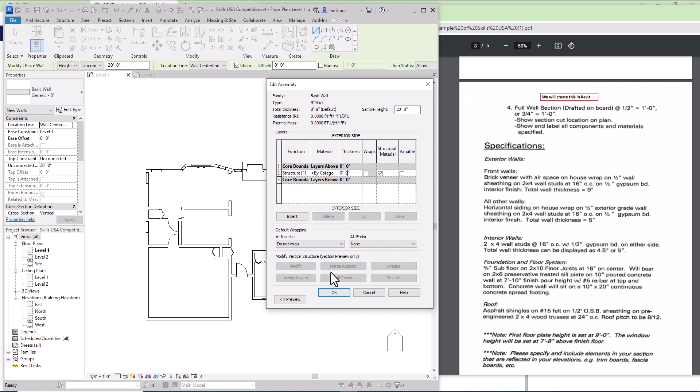Once you create that wall, in fact, I'll change this one to 9-inch on mine, but you go through and put the layers in here so that you can get the materials so that later on you're going to see that it's brick on the outside. You see how there's exterior and interior? Go back to that assignment and brush up on it and create that. I'll go ahead and create it as 9 just so that I can have one.

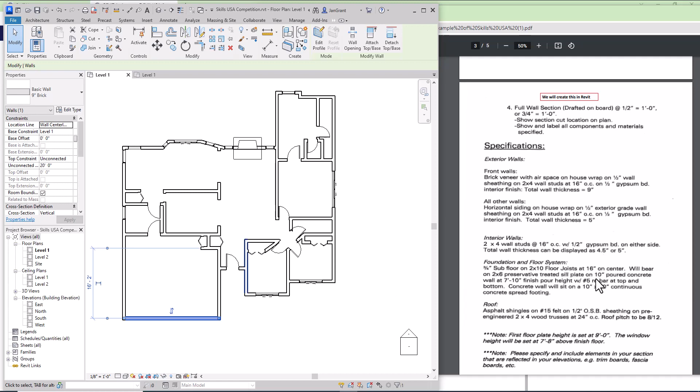So that means that all of those exterior walls that you've created, you can select them and come over here, drop this list down, and go to your new 9-inch wall that you created and make sure that all your exterior walls are that 9-inch wall that have brick on it. You can tell that it has brick on it by looking at the plan itself. All of this along the outside, in front of the garage, the whole front. So the whole front of the house right here is brick, but everything else is siding. So it's going to be your other one on the outside, and then you'll have interior walls.

So once you create all of those, you can swap them out. The other thing I want to show you here is we don't want to end up with a bunch of little segments of walls. We need to have one long wall that's all one piece with these openings. So the openings will help you to have openings without the whole wall going all the way up and taken out.

So if I looked at this in 3D and I got close enough, you see how this is going to have these openings, whereas this other one over here that's separate. And you know, this is us starting. I'm so happy that you are working with it. You see how if we have separate pieces, the whole wall is going to go all the way up. So good learning experience, right?

And so, well, that's the first thing I wanted to show you is to create your walls. Make sure that you have those walls swapped out and that you have your, I have my list here, and that you have your openings in there so that we don't have the walls all the way up. And then from that point,

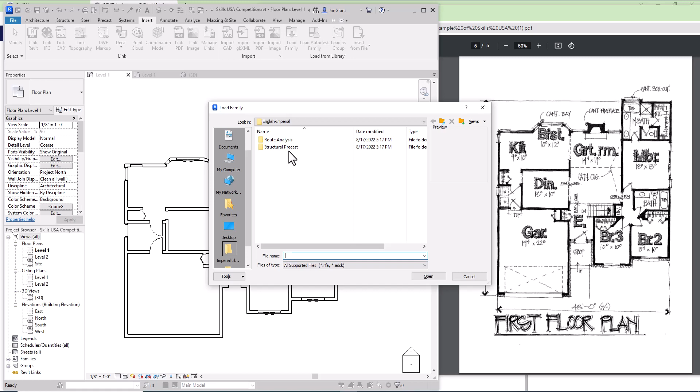Now some of you may have the older Revits, and you could pick load family and actually see the loaded families here. I did include in the modules a link to getting all of those so that when you click on here, you have them. I just haven't done it yet. But if you didn't do that, you can go here under Insert. You should be able to go to Load Autodesk Families right here.

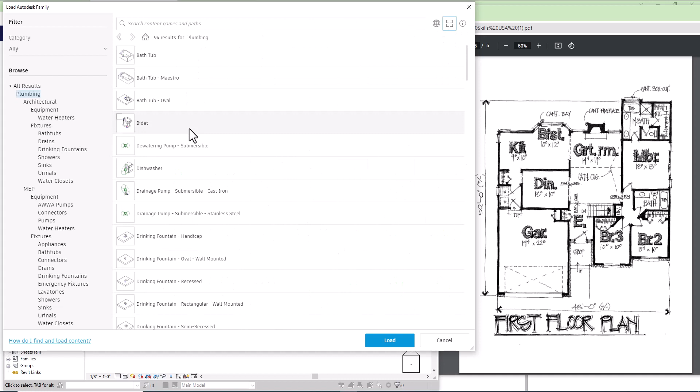So what we're looking for, the category that we're looking for is plumbing. If you go over to plumbing, even if you had all of them in the other icon there direction, and depends on how you want to look at this, you can look at it in this tiled view up here. You can change this to a list view. I have a whole list of things that you can get from here.

You can put a check mark in dishwasher here. You should be able to get the lavatory vanity. If you'd like to use that one, it has a sink already in it. We have a stacked washer and dryer in here someplace. So let's take a look. There it is. I mean, you may or may not use it, but you can look at that as an

option. We have this toilet domestic 3D right there, and there's a tub as well. A tub right here that is 3D. We want to try to get 3D so that when we get our camera views, we can work with it in a better way for our views.

And then we have a washing machine in this one, and we're going to need to find a spot here, guys, for the water heater. Something really small and tankless, but mostly typical. We're going to have to find a spot in the plan for that. So these are a few that we need for our drawing. I'm going to go ahead and pick load. Once it loads in there, I'll be able to use it.

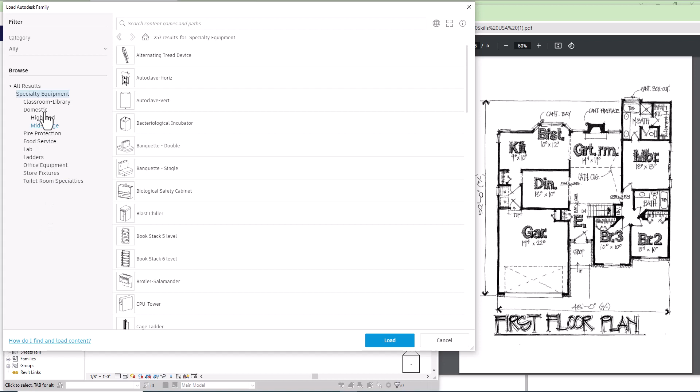And then the other thing, we can go back to the load Autodesk families. If we go under all the categories, look for specialty equipment right down here. Under specialty equipment, we have domestic. We have a lot of other categories, but we have domestic. And if you look through here, we have a bunch of things. We have a dryer, so you can pick up a dryer. For some reason, they have the washer in the other one and the dryer in this one.

But then also, as we start to develop the kitchen, you may want to start designing it for some type of range. There are a lot of them in here. Or refrigerator. Here's a refrigerator that has the side-by-side doors. This is your design, completely your design. You can look through here and decide on what you're going to use.

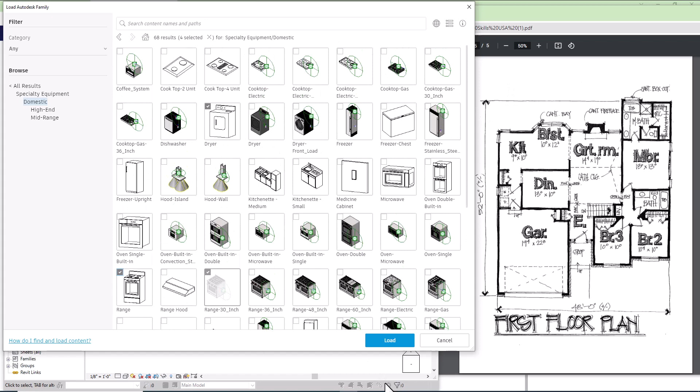Here's a range. The 30 inch is typical, but there's another kind of plain one there that doesn't have the grill on the top. So it really depends on what your design is as you start to work with this. Okay, so let's say I'm going to load some of those as well.

So now that we have all of that, and I'm repeating some of this, we know we can go up to architecture and go to component and place a component. And then we have our refrigerator and different things that we can bring into our design.

So once you get that at the end of your pointer, before you click to place it, you can use the space bar to rotate it. And once you find the rotation that you like, you can then place it.

I'm going to go ahead and put it right, I don't know where, so I'm just going to put it there for now. So use the component, place the component to bring in all of your things that we just loaded, the tub, the toilet, the vanity, kind of rotate them around.

When you click on this, you will also have a rotate underneath modify. There it is. It's like an arrow that's a circle. If you click on that, you can pull your mouse straight to the right or up to the left or straight up to establish a beginning point here, and then pull your mouse up and click, and that's going to give you that rotation 90 degrees. Okay, so start working with that. Make sure you have your walls in place.

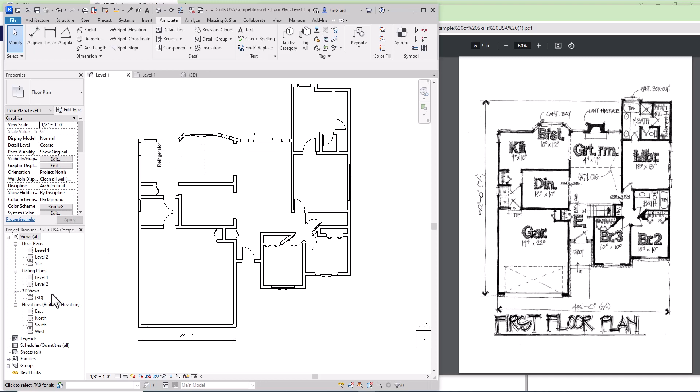Okay, another thing that we need to do is make sure that all of our walls have the correct height as we move forward. Here, if I go to the 3D view, and this is how most people actually turned it in because we didn't talk about it, all of these walls are unconnected, which means they're 20 feet by default. So what we're going to do is go to either east, north, south, or west elevations down here at the bottom left. And you'll see that level 2 is 10 feet. Well, we'll start with that anyways. We might want to put it higher, but 10 is good.

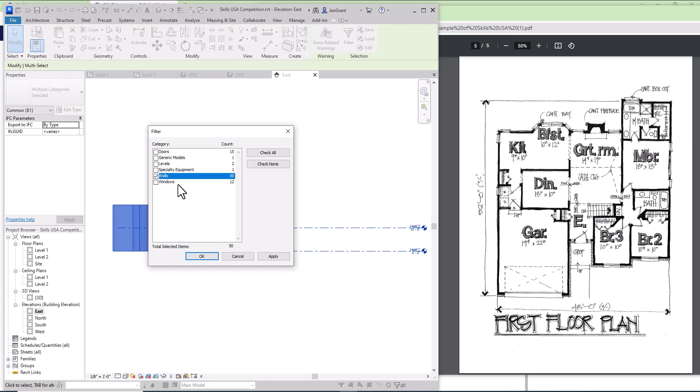So what I want to do is select everything. I'm just going to hold my left mouse button down. I'm in the east elevation. I'm going to go ahead and select everything. And then I'm going to use this little filter up here. It looks like a little filter icon. And I'm going to uncheck everything and only check the walls. See, this is one way of filtering through a whole lot of objects in order to just get the walls. So just the walls, pick OK.

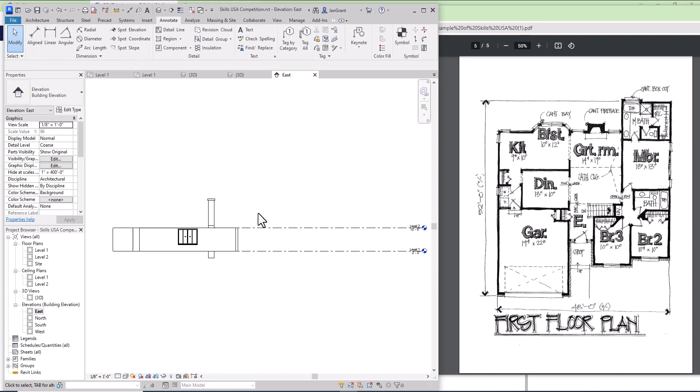And now over here under properties, the base level constraint is level 1, but I want to change the top constraint here to up to level 2. Top constraint level 2. And then pick apply. And look at that. It changed all the walls up to this level 2, and now it's all in line with level 2.

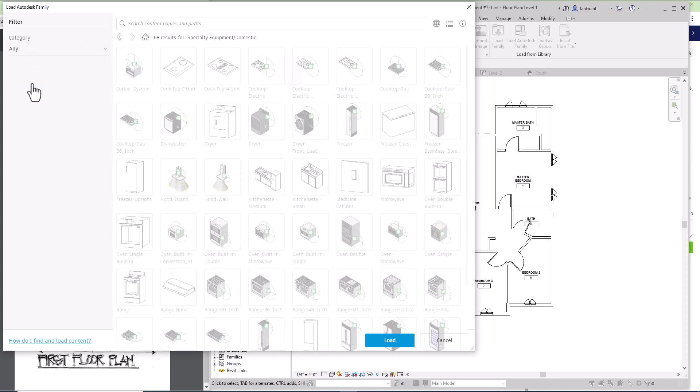There's something else we can start to think about: the kitchen layout and how we want to create our base cabinets. I'll show you now. If we go to Insert and Load Autodesk Family, we're looking for casework. So we're going to go back to everything here and go to casework.

And if you really look at this folder, there's a lot here. You can decide on a combination of several cabinets for your kitchen. And we also have countertops that are different as well. I believe in here someplace they do have, here it is, one that has the opening for the sink to be placed, or actually has the sink in it, like these two.

These are good ones to load, because this one's kind of an L shape if you decide on that design for your kitchen, whereas this one is kind of straight. So this is just the top itself that's going to go on these base cabinets. So here's a single one. Here's a double one. They have a double one for under the sink. We have little pieces in your design where you just want to put a flat counter. In fact, I like to load that as well.

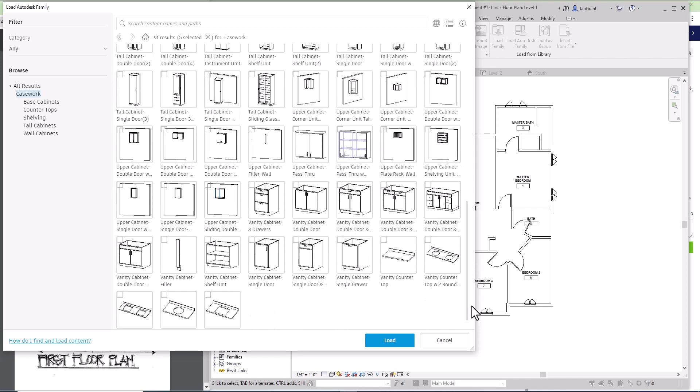So look in here, see what you want to use. I'm going to load those just to be able to show this to you. And then at that point, they're actually like a component. So you can go over to Architecture and pick Component and Place a Component, and you'll start to get those things that we're working with. So here's a straight counter. I want to put it there, let's say.

And then over here, we have this L-shaped counter. Remember, you can use your space bar to rotate it around, but let's just say that's your design right there. That's only the counter itself. So maybe this one, you want to have it over here. I'd have to rotate it because you can see the backsplashes at the back. But once you have it in place, you can use all these arrows to pull it over, make it longer. You can even change the location of the sink as you're working with it.

And so that's just to kind of get you started. You can go over here and grab your base cabinet, and whichever cabinet you decided on. There are all these different widths that you can work with. There it is. Let's say I want to rotate it so that I can place it over here underneath this countertop. So it's going to go right around there.

Now I have to check it out to make sure that it's okay, because sometimes I have to turn it around, but I'm going to go ahead and click on it and use the arrow keys to get it down in underneath there. Now if I want to see what that actually looks like, I'm going to go up here underneath this house icon and pick Camera. We did this in one of the assignments. I'm going to click over here and pull my mouse across so you can see that cabinet. And now you can see that I'm developing a view of it so that you can look at how it's working out.

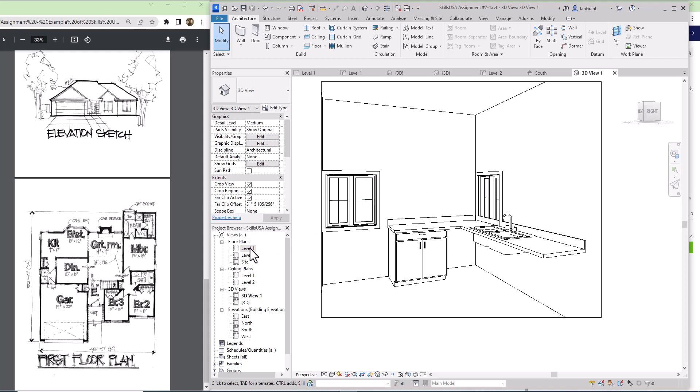But at this point, I think you're ready to pull in the refrigerator and the stove and the dishwasher and maybe these counters. Maybe this one's just a little counter that's over there somewhere by the stove, with a little base cabinet underneath it, because you're going to load the one that works with that counter, and start to develop your kitchen.

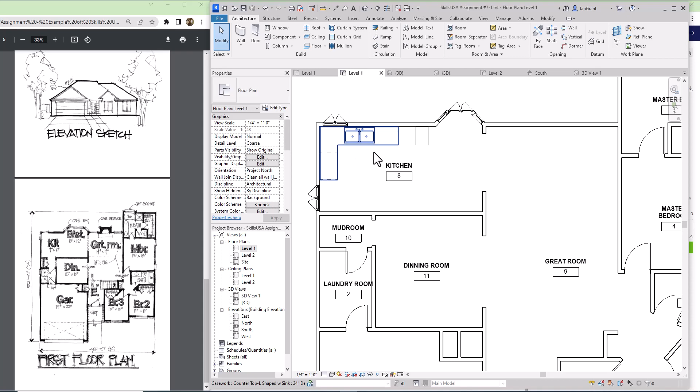You may even have an island in here, and we'll talk more about some of those details, because you might not want, for instance, a backsplash on it, and that becomes more of modifying a family itself. So yeah, do the best you can at bringing in all of those components, those cabinets, and those fixtures. That would be our next step. Fix your walls, get your floor plan to look sort of like this as we move forward. All right, have fun with it.